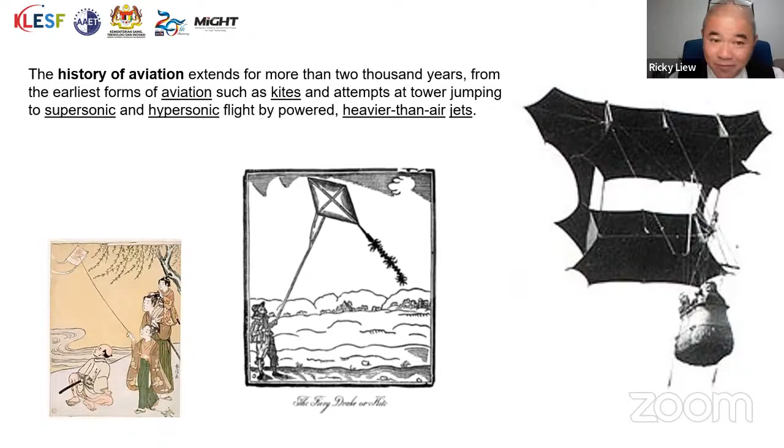Leonardo da Vinci was actually born in the year 1452. We are talking about almost 600 years ago. He is an engineer, an artist, a painter, and also an engineer. He was the one who came out with the idea about flight, man flying.

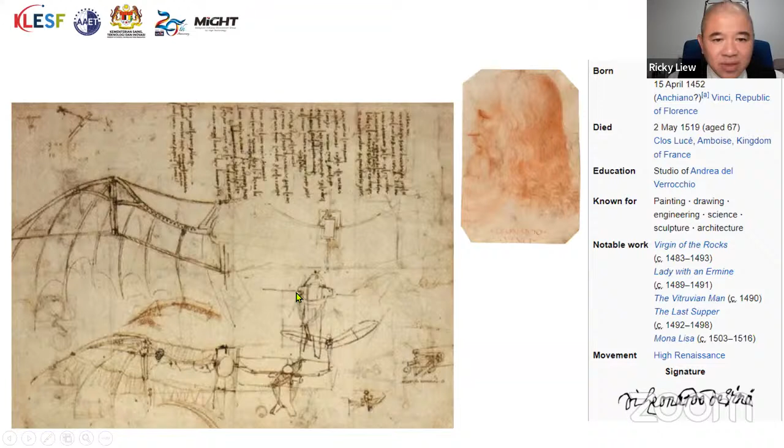You can see from this picture here, this is how he drew the wing that can be attached to a man so he can fly. At that time, those were the aspirations. The engineers thought about it, how to get human beings up in the air. And he came up with a glider, with gliding wings.

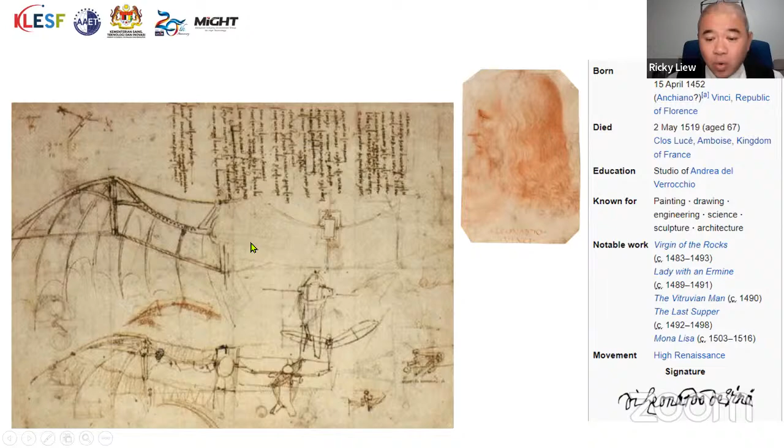So after that, what happened? After that came, we see here the Wright Brothers, but I'm not going to touch the Wright Brothers here first because I'm going to touch it later. But we look back and see what we enjoy today.

We enjoy a nice holiday in Europe, in America, in Australia. It's exciting, right? But nowadays, how many people really go on a ship and travel to UK? No, right? Majority of us fly in a nice 787, or probably an A380, and fly to Europe, to Australia, to enjoy a nice holiday.

And then when you're in flight, the aircon is so nice and comfortable. You have good food served to you. We just click one bell, just one click, and call the cabin attendant and say, I want a hot white coffee, that kind of thing. So there is a lot of excitement today that we enjoy.

Remember, all that we're enjoying today, the holidays, our children being able to go overseas to study, comes from the very foundation work of our initial pioneer engineers, past engineers who suffered a lot, who sacrificed a lot in order to build the initial machine that can carry human beings. That is the excitement they have. There were a lot of challenges.

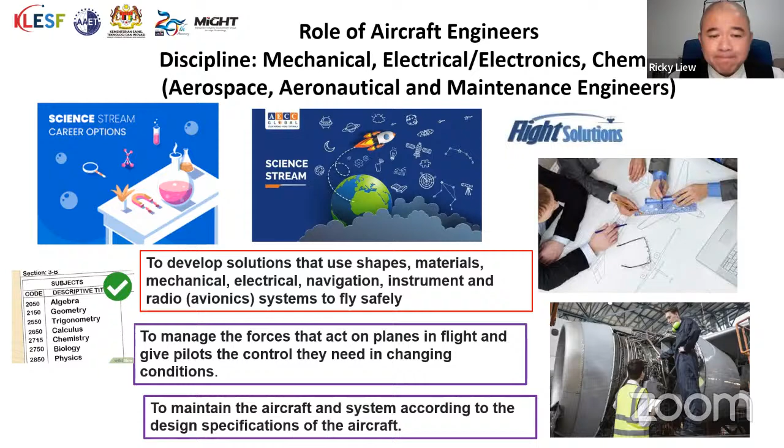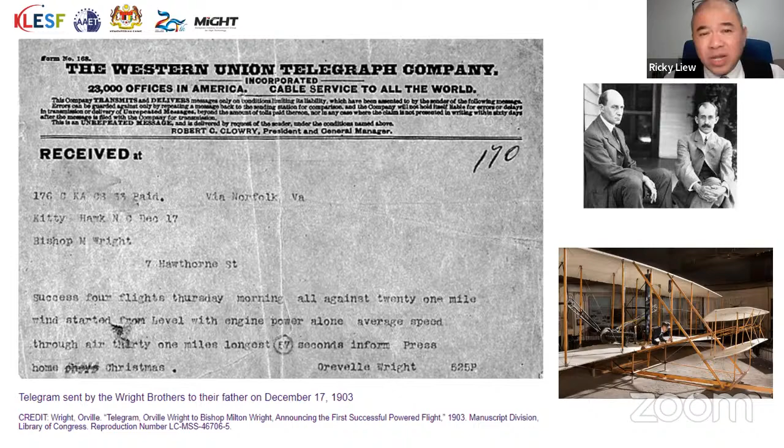This is how Prof. Engineer Saleh — he's also a professional engineer — you see, these are the mindset, the virtues of an engineer. We should carry this kind of virtue together and pass it on to the next generation. Never forget, as engineers, we never forget our parents.

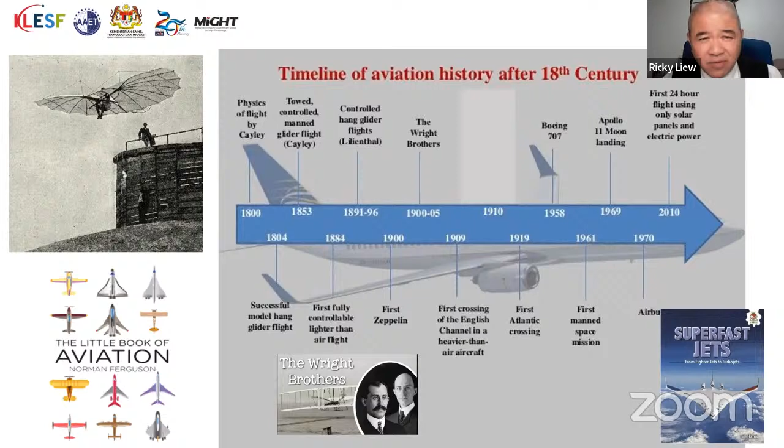But let you know, the Wright Brothers actually dropped out. They did not finish their high school. They were actually drop outs. But it is the passion, their interest in getting a flying machine, all the engineering work, all the technician work that's involved - he will get it done.

It's very hard. So therefore, the foundation of this world, the development that we see, the flying machine that we see, the helicopter that we see, even the drone that we see, still lies on the fundamentals of Bernoulli's principle. If Bernoulli did not discover it, today we might not even have a flying machine. We might not even have helicopters.

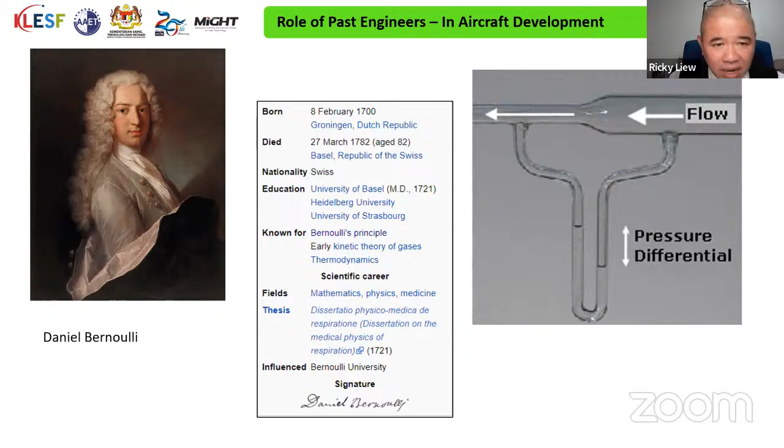The only problem at that time, he could not control it. Why did Otto Lilienthal crash and die? Because at that time there was a very strong gust of wind that blew up and lifted his wing, his glider, and because the wind was turning, it made the glider out of control, and therefore lost the lift of the wing and he crashed.

Now, he himself is a mechanical engineer. It is all about lessons learned. We respect Otto Lilienthal, but at the same time, where did he go wrong? What was wrong? And who actually overcame the problem?

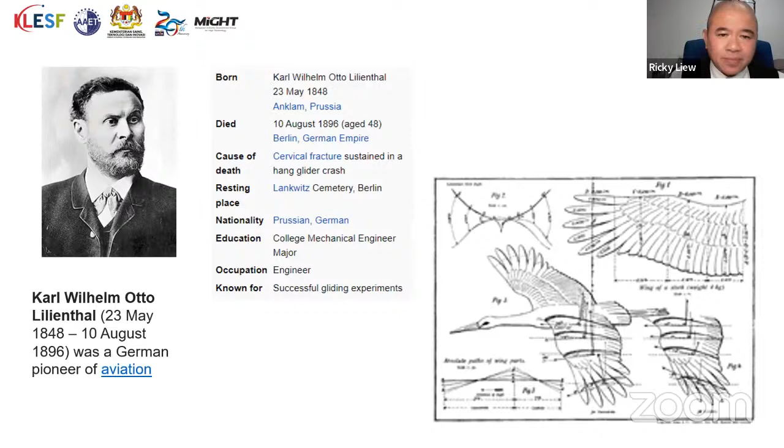And this is Otto Lilienthal - you can see here, it's on top of a hill. They even later built a tower so that he could actually glide down. Unfortunately, he crashed and died the next day.

Now, who is the person who actually took all the failures of Otto Lilienthal and put it into a better perspective? It is actually the Wright Brothers. The Wright Brothers realized that Otto Lilienthal could not control his glider. He cannot control it, just like we are driving our car - imagine if you don't have a brake and your steering wheel does not listen to your hand command, you're sure gonna get an accident, right?

So similarly, the Wright brothers put this principle into practice. Now, if I were to fly an airplane, what are the things I need to control? Otto Lilienthal could not control the wind, because wind is a natural thing that flows around - sometimes there is, sometimes there isn't.

So what did the Wright brothers do? They built an engine, cast an engine casing, built a piston engine. The purpose of this piston engine is to provide propulsion. Just now Otto Lilienthal couldn't control the wind, but now the Wright brothers can, because they built an engine to drive the propeller at the back. That is how they got the first control, the propulsion control.

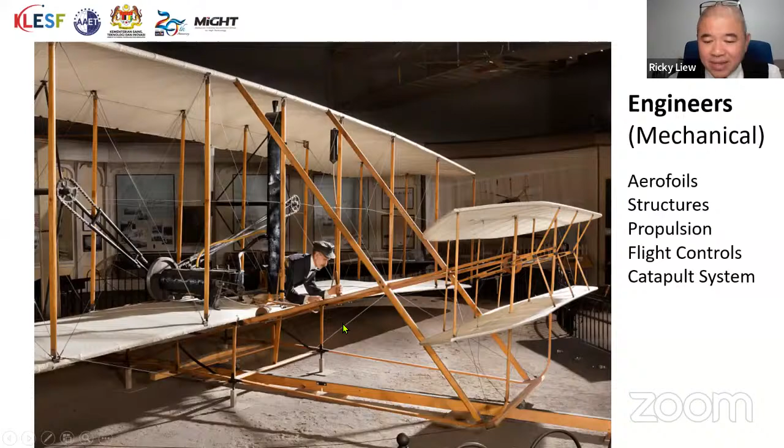But by the time of this picture, engineers had developed stronger engines, stronger flight controls, and stronger landing gear, though still very mechanical.

Now the engineers continue to build bigger planes. Instead of putting one engine like the Wright Flyer or the earlier World War I planes, they built four engines mounted on top of the fuselage, between the wings, giving more propulsion power. The flight controls still remain the same.

Bigger engines, bigger power, but the flight controls remain the same. And because you now have much more powerful engines designed by the engineers, you remove the catapult system. You don't need it anymore, but you need a much longer runway.

So you can see how engineers developed from a very bare skeleton kind of flying machine into bigger wings, fuel tanks, tires, more engines, and a bigger fuselage. You can see here the corrugated lines on the fuselage.

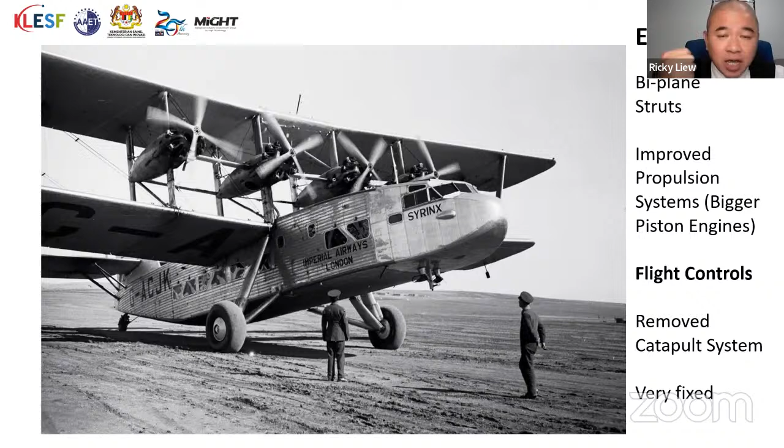Those of us who have studied engineering before will realize that this corrugated fuselage, once corrugated, becomes much stronger. It gives it rigidity, which makes it strong.

This is also another airplane. When people start to fly, we see passengers coming in. But as engineers, when we see passengers trusting our machine, believing that what we design will be good, what is the thing that comes to mind as an engineer?

It is safety. Safety, safety, and safety. Engineers work on the principle of safety first. It's always like that—whether mechanical, electrical, electronic, or aerospace, the moment an engineer neglects safety as the main principle, it opens the path to catastrophe.

There are times engineers have to make very tough decisions, sometimes against company decisions, putting aside commercial profit to make sure the aircraft is safe first. For example, when the aircraft was grounded, I told the pilots the aircraft is grounded in Kota Kinabalu and I'll be coming over.

Our focus now is on the safety of the plane. We know it will cause inconvenience to passengers and losses to the company, but as engineers, that is secondary. Engineers always think of safety first.

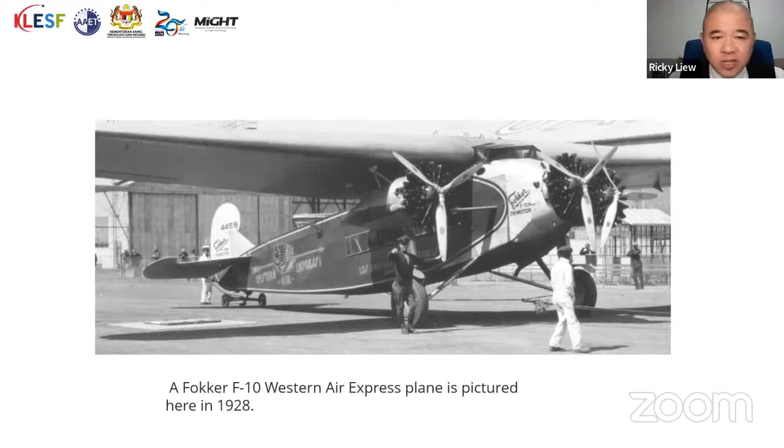This is also another example. You can see engineers build bigger and bigger airplanes, put in more and more engines, but the principle does not change very much from the Wright Flyer. This is also from the early 1920s, showing a movie in flight.

Even the engineers had to design an in-flight entertainment system so passengers could view and watch a movie as they fly. But remember, in the early days the airplanes were very, very noisy, and I don't know how they were able to listen to it, but they wanted to watch movies, and the engineers allowed them to.

They even designed the seat. If you look at the picture, the seats are actually like very old rattan type of seats. Eventually the engineers decided to design an even more comfortable seat, the one we enjoy today in first class, business class, and even economy class, much more comfortable than this seat.

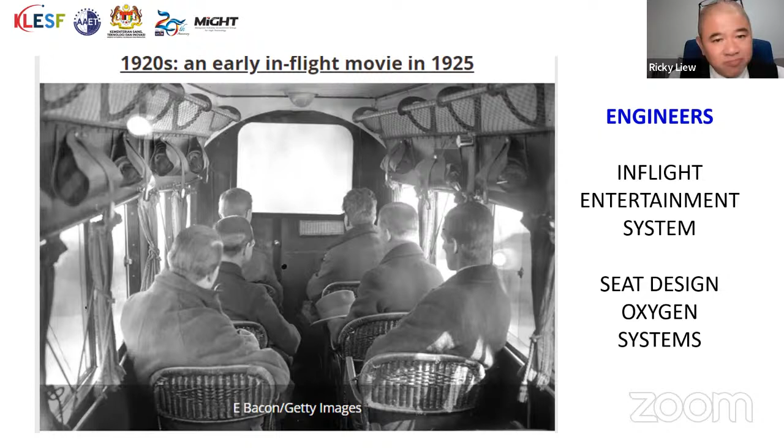Engineers don't just study and then stay stagnant in what they are doing. Engineers continue to develop and improve products - electrical systems, oxygen systems. This is another example of the entertainment system. At that time they put on the headset already. So engineers developed the in-flight entertainment system and communication systems. Those are examples.

In 1938, this is actually quite a significant change compared to the Wright Brothers' time. Boeing developed an airplane, still a piston engine, still using the three flight controls, but this time they put in a pressurized fuselage. Human beings can normally breathe up to 10,000 feet. Now with a pressurization system, the airplane can go above 10,000 feet. Today we fly up to 50,000 feet - like the Gulfstream aircraft I'm rated on, we flew at 51,000 feet in the US and came back to Malaysia. So this was the big turning point in 1938.

Boeing came out with the Boeing 307. The engineers came out with a system that you can pressurize the cabin so that you can maintain a comfortable 8,000 feet, where you can breathe normally, you can eat, you don't have brain impairment and all those. On top of that, the engineers were able to make the aircraft fly above bad weather. Why? Remember, engineers - safety first. So today we have a very smooth and faster ride because of this kind of development, including the engines.

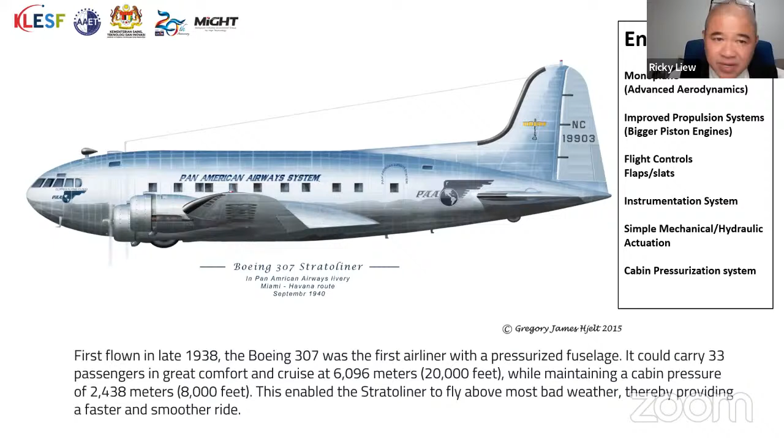Now the engines - just now we talked about piston engines. Piston engines have a limitation because piston engines cannot fly high. Because piston engines just stick with the ambient air. Even if you put on a turbocharger or supercharger to compress the air before it goes into combustion, there is still a limitation.

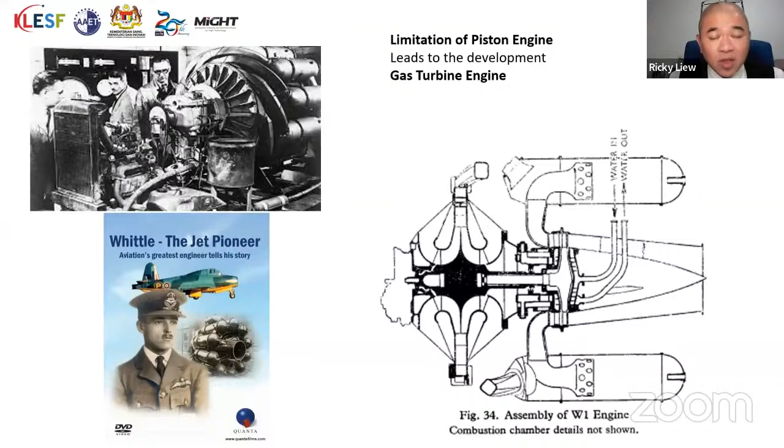So this gentleman here, Sir Frank Whittle, he looked at the problem - again, there's a problem, right? As an engineer, he found a solution. He came out with the gas turbine engine. Sir Frank Whittle came up with the very first gas turbine engine, and that was the engine that changed the airplane from a piston era into the jet, gas turbine jet engine era. And that is what most of our airlines are flying today - all our commercial jet engines are gas turbine jet engines.

Now earlier we also had analog systems. This analog system means that it's very mechanical - we had not gone into digitalization yet. So from the beginning of the 1900s, 1903, even up to the 1970s, the majority of systems were still using the analog system, cable operated, very mechanical. Even the autopilot system at that time was pretty mechanical.

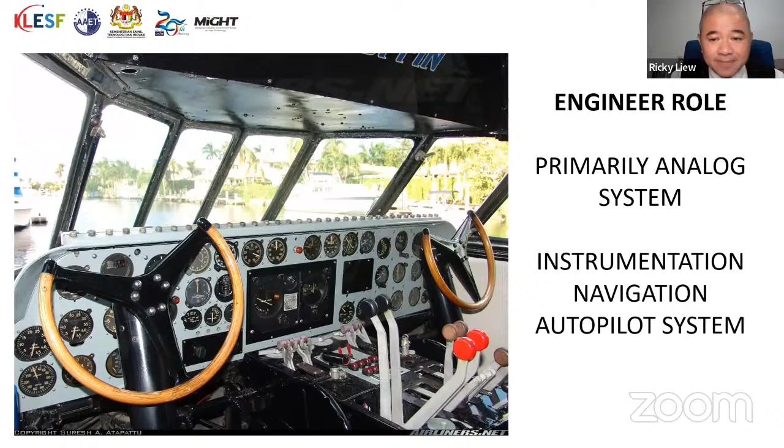The actual autopilot existed in the year 1912. Engineers came up with this smart idea - if the airplane is flying, how do you maintain straight and level flight? You cannot be holding the control column from Kuala Lumpur to London for a 12 hour flight. The pilot cannot be holding the control column just like that. So they incorporated an autopilot system, which uses a more complex gyro system to ensure the airplane can stay in straight and level flight.

Also for commercial airplanes from the 1950s onwards, it was no more just one or two pilots. They put in the flight engineer, the radio operator, and also the navigator. So the earlier planes had two pilots, one flight engineer, one radio operator, and one navigator. Problem, right? Every time you want to fly one flight, you need 5 people to fly. Instead of 2 pilots flying, the other 3 are occupying space which could be sold as passenger seats.

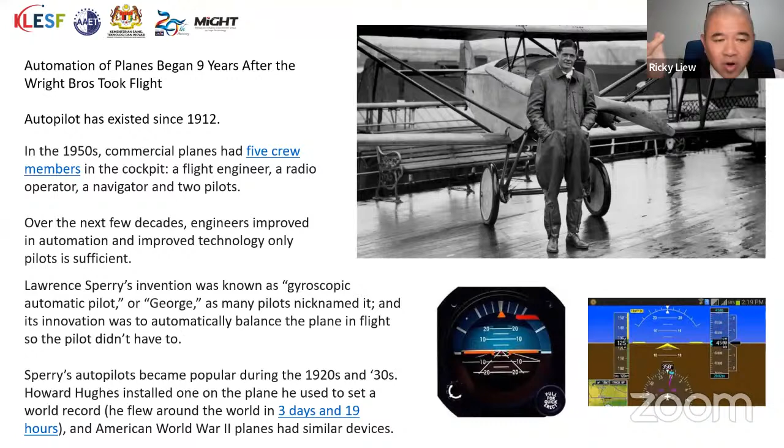Very much you can see it's very mechanical, an analog system. You might have digital system, but it is still very, very limited. Now this is a 737-400, where I'm rated on.

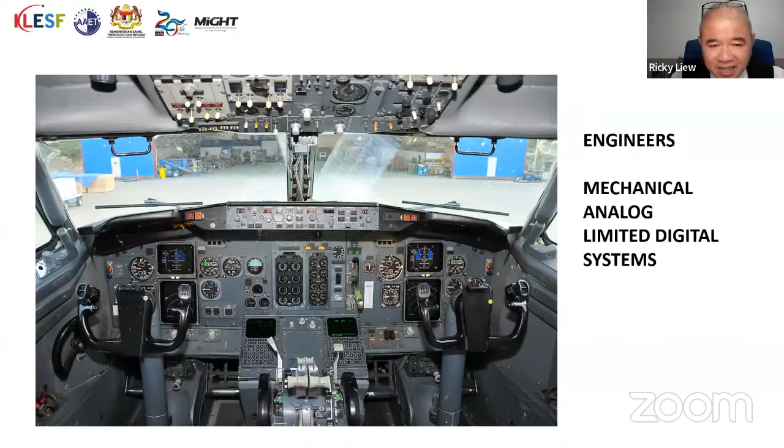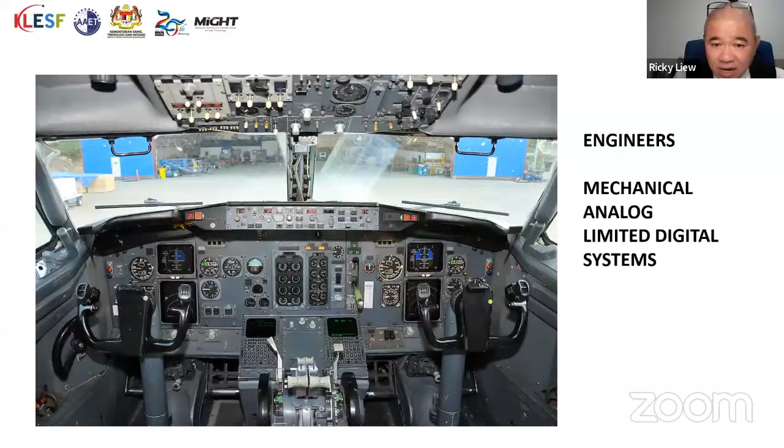You can see this came in the 80s. Now it is going from the analog system into digitization. You can see the glass cockpit start coming in, but you still have a lot of switches, but you start seeing the monitors and the digital scales and all those.

This is what we have now, and this is the aircraft that I'm rated on. You can hardly see any switches. Why? Because we have entered into the digital era, where now a lot of engineers are converting the mechanical systems to be integrated into the digital systems.

So therefore, the digital engineers, the electronic engineers, also play a very important role nowadays. Initially during the airplane design, mechanical engineers were important. Today the mechanical engineers are also important, but now they have to move into more of digitalization.

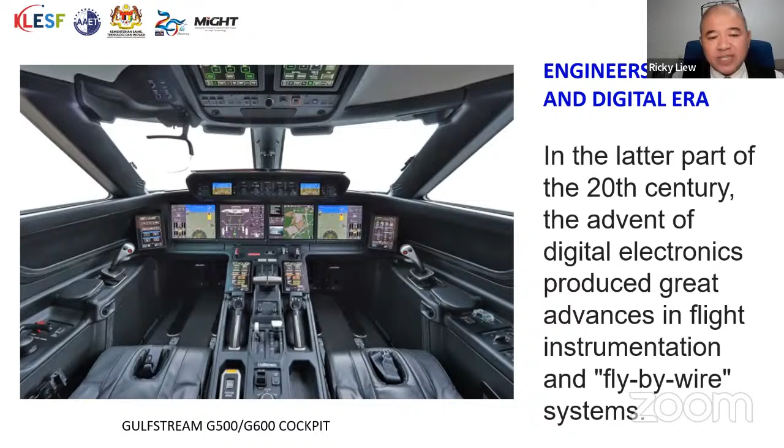Now, when we put the aircraft into automation, when we digitize the airplane, there is a risk. The engineers have to be very careful so that there is no over automation. What does over automation mean? It means the automatic system takes control over the pilot.

And that is exactly what happened in the very recent Boeing 737 MAX crash. The JT610 and the Ethiopia Flight 302 are a classic example where, if the engineers are not careful enough in designing the automation system, the automation system takes over the pilot and the pilot cannot control it.

Just like what happened on these two flights, the system automatically kept the nose down all the while, even though the pilot was trying very hard to pitch up the nose of the airplane. They couldn't, because the system was overriding the pilot, until the aircraft crashed. This is an example where engineers have to be very careful to ensure the pilot is always in control.

Any automation system on the airplane, the pilot should have the control to disconnect the automation and fly manually. After the 737 MAX crash, one of the biggest improvements they made on this airplane is actually letting the pilot override the MCAS system. The pilot can just disconnect it and take over the flight.

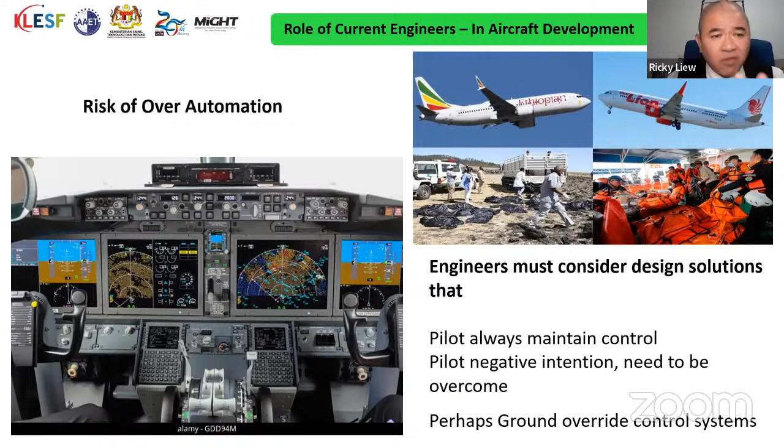Okay, now however, this is the new—we are talking about the future now. Engineers also have to overcome the limitation of gas turbine engines, and this is very much on the sustainability issues. Gas turbine engine is powerful. It can produce, one engine itself, like the GEnx engine...

...can produce 100,000 pounds per engine. If you have two engines, you have 200,000 pounds. That is extremely powerful, but there is still a limitation. Why is there a limitation? Because of sustainable development goals—gas turbine engines use fossil fuel, and fossil fuel pollutes the environment.

So now the airplane has developed to a stage where we get the machine flying. We have the system, the passenger can fly comfortably, we can fly high and safely. But then we have another issue—the environmental issues, sustainability issues. We don't have much more resources; our fossil fuel resources are limited, and we are polluting the environment. Now, who solves the problem?

Engineers law. So now the engineers now has to move to another era. We are talking about electrical propulsion systems, some already developed, some are actually being developed, depending on what type of system. We are talking about hydrogen fuel, and we also talk about ionic propulsion systems. This does not produce contaminants and pollute the environment.

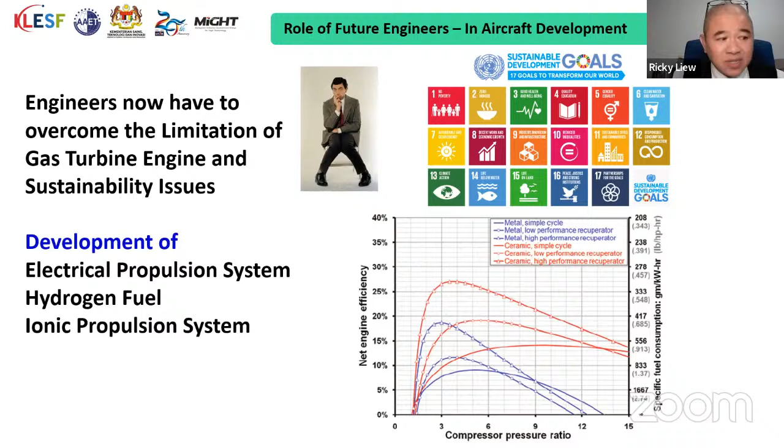So these are the roles of the future engineers that we are talking about. Number one, in aircraft development, we also have to look after social and economic development. You cannot simply design planes using heavy metals, keep digging for aluminum or steel and all those to build heavy airplanes. No, we have to come up with new methods of manufacturing, new methods of design, new metals or materials to be used, composites and all those.

Because we have to also think about social and economic impact. Climate change, I've mentioned about it just now. Now, the other thing is the noise produced by the gas turbine engine is so noisy, we have to find ways to reduce the noise of the engine, and the local air quality - we are talking about air pollution just like just now. We also have to ensure the surface access industry, meaning the ground industry is also protected by our design of the plane.

And of course, natural resources and environment - we have to effectively manage and use materials that are necessary, and avoid materials that are actually damaging to the environment. We do not want to use it. As engineers, we are responsible. And then there's implementation of full industry commitment to sustainable development. The world is not just the engineers' world - we have so many people, the bankers, the academicians, the business people. We actually have to come up with a system to make sure that whatever we design, whatever we develop, whatever we maintain, does not do harm to any of these people. It's our natural responsibility, and we feel proud of it.

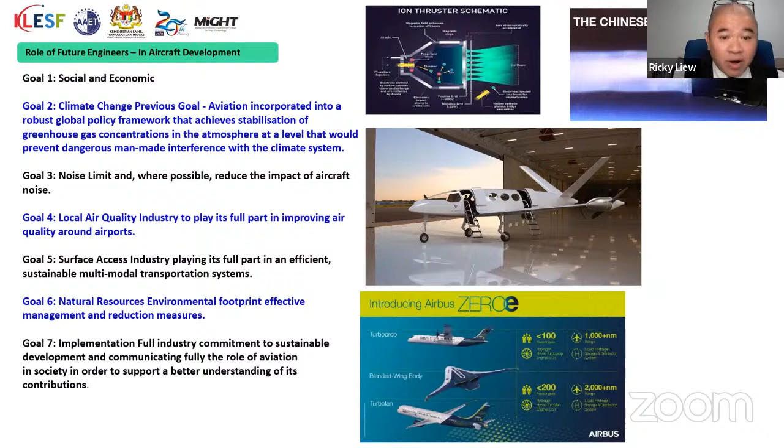Now, these are some of the electric aviation airplanes that I'm trying to share with you all here. Very futuristic, it's been tested and ready. Entry into service using electrical systems, no gas turbine, pure electric motor and fan and all those. Entry into service 2025 in Germany - mechanical engineers, electrical engineers, aerodynamics engineers.

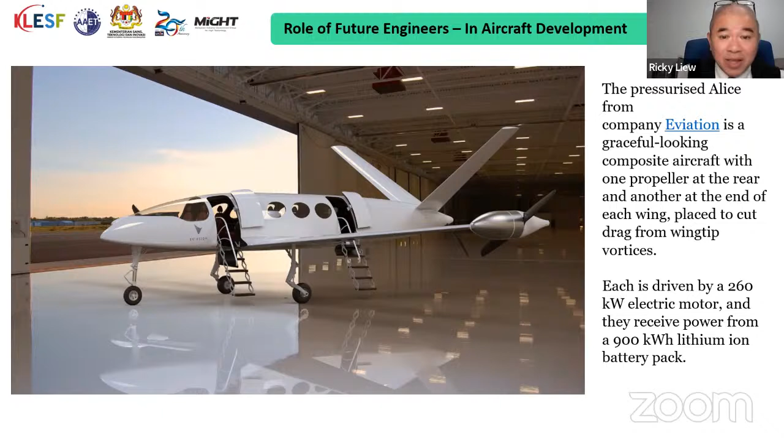This is also another plane, very competitive. This airplane is actually fueled purely electric, using battery power, a lithium-ion battery pack. Very powerful, has been tested, expected to go into service in two years. And this airplane costs about $3 million. Worth it.

These are some of the planes that we can see in the future. We need a lot of engineers. So I encourage all the students here, take up engineering, take up your science subjects, and plan yourself to be the engineers of the future, because these airplanes, what you see on this slide, are still under development, at the infant stage. We need more engineers to come in and actually develop them, improve them. Maybe by the time you come up with the best models of what you see here, I might not be around anymore, but we lay the path and continue to encourage the engineers to move on.

Now, characteristics - what are the characteristics of engineers of the future? We talk about Elon Musk, right? We talk about Michael Faraday, we talk about Jeff Bezos and all those. These are all engineers. But there are certain traits that they have that we also need to build within ourselves.

Number one is passion in engineering. Don't study engineering because your parents ask you to. Don't study engineering because it's glamorous to be an engineer. You study engineering because you have passion in engineering. You know you want to support the people in the world, and we take it as our responsibility, because we have acquired knowledge that other people don't have. We have understanding of systems and technology that people don't understand, but we can understand.